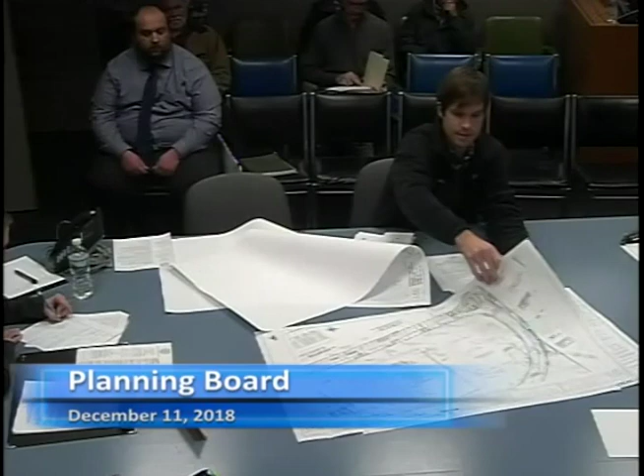The only other comment was detail for the illuminated crosswalk sign. I provided a cut sheet last time, but I've added that into the design plans - it's right here. It's going to be a solar-powered, push-button actuated crosswalk where the lights flash when somebody hits it, to really grab drivers' attention in that area. It's MUTCD compliant.

So what happens if it's been cloudy for 2 weeks? I'm not 100% sure on that. I just know Mr. Coyle said a solar-powered one would be acceptable for him in that location. So again, that's what we're proposing.

Just make a note, I want to hear that he said that. So you added it to that plan? I don't see it on this plan. Well, I do have these comments - I made those today. I do have some small copies if anybody would like them.

Here's my problem - we're in a meeting, we're supposed to have this stuff ahead of time, and you want us to make a decision on this tonight when none of us had a chance to look at it. It's the same plans I submitted, with just minor changes. No - you have a drain crossing now, and you don't have a detail on how you're going to cross that drain. I don't know if you're using stone, flowable fill, whatever, I have no idea. It's going to be standard construction practice for crossing drain lines. And that is what? Normally you backfill with crushed stone to support and protect the pipe.

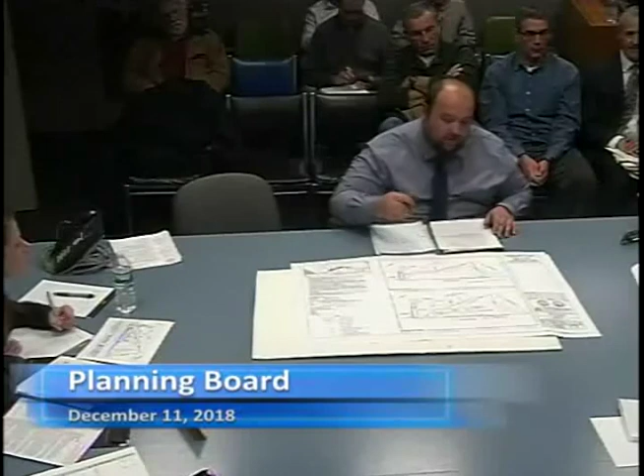And you're going to tie into the existing sewer, correct? Yes. Do you know what size the sewer main is? I know where the lateral is, I can get the size on there. There is a lateral, yeah, there's a lateral.

So my question is, if there's a lateral, you're gonna tie into an existing lateral, why is there a detail for Y&T saddles for 8-inch lateral sewer connections? Those are pretty standard, kind of boilerplate details. I can update it to make sure it accounts for tapping into a lateral.

And you already said you're gonna get the soil test to us. Yep, that has been performed, and I can get you all that information once I give you my next plan set. Just the landscape plan, we're gonna need that. How wide is your opening, the curb cut that exists? Can you just put that in when you bring the plan, please?

Until we bring this one up. Looks like it's pretty, looks like it's 40 feet. No? 40 feet. That's 50. No, it's a huge opening. Actually, it looks like there's two on there.

And we'll need something of a landscaping plan. Now, forgive me, I'm not super familiar with Auburn's bylaws - do you have a landscaping guideline for parking lots? I can check our bylaws and get some details. Where we'd want to see landscaping is just along the front, not on islands, to provide a little screening as you pass - maybe some arborvitae's or something low along the front. Nothing too tall, because you don't want it to block the sight line. You want something that's gonna look nice, like a yew or something like that. Make it look nice.

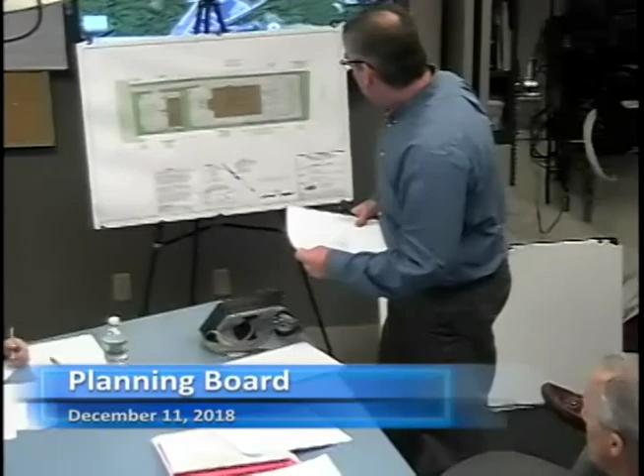We took comments we received from the board last time, and it doesn't reflect on this plan, but we have widened this driveway from 20 feet to 24 feet. That opening has widened a little bit as well, just to incorporate the same radius, so that driveway is 4 feet wider, basically from here all the way through to its end.

I did put together, and if I can pass these out, some sections we talked a little bit about — the grade changes. A section through the property, and a section through the center of both buildings, to show the grade changes and give you a little perspective from a section looking forward from the street. If it's okay if I pass these out?

One more? Two more, sorry about that. There you go. And there are — I just want to say, two sets.

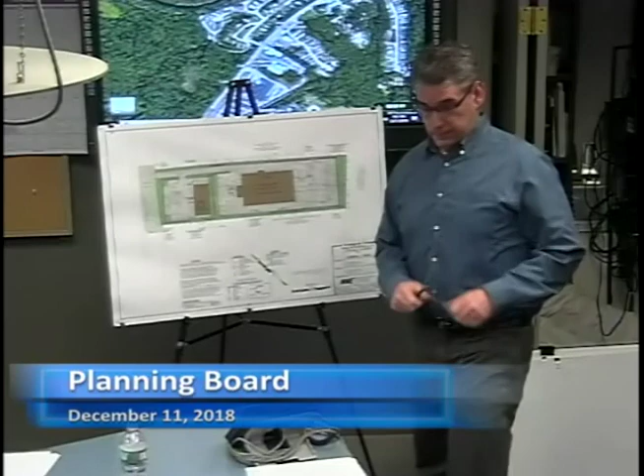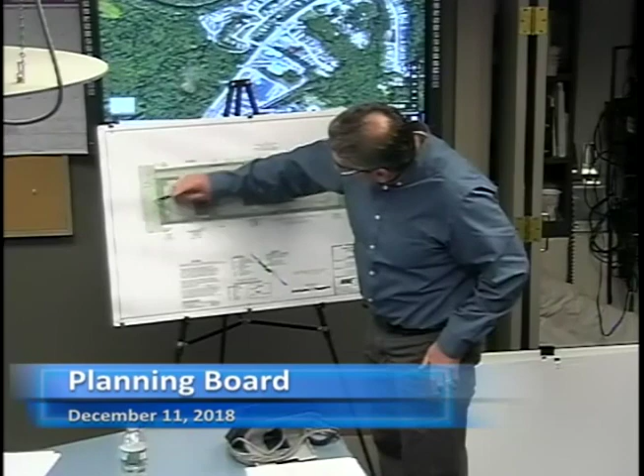And what about the landscaping on the front side? Yeah, we do have some plantings in the front. There's a large planting bed in the front, and then some ornamental trees along here, that was part of the original submittal. There was a fairly decent-sized planting bed right in here, actually.

Mostly low plantings, yes, but you may recall when we met a couple weeks ago, there was a landscape plan that did include a significant number of plantings in the front of the building as well. But there was a plan, I don't know if you...

And I remember we talked about something, I'm not sure what it was, putting the building in the front and the parking in the back, or the parking in the front and the building...

What we're trying to do is get more visibility right on the street versus having all the parking in front of the building. There was a lot of time put in by the engineers and the contractors with the client about the best way to gain visibility and fashion the site so you're seeing the optimal look from the street. One of the issues was that if the retail building were flipped, the back of the building would essentially be facing the street, which at the end of the day, from a design standpoint, was not optimal.

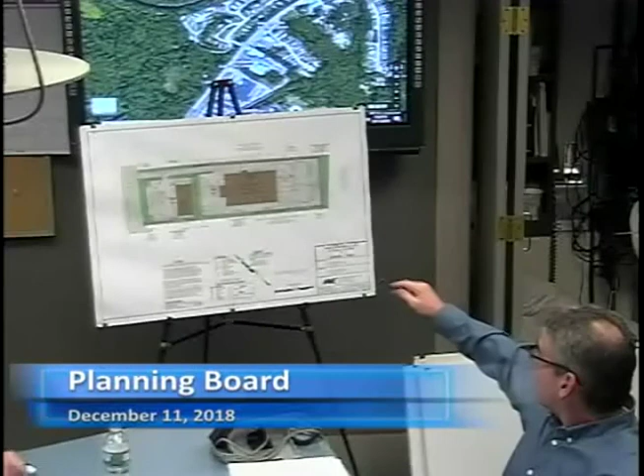So how does not having a fence on the back side of the property help with safety? I think your point is well taken, but it's because it's not populated behind the property. Our bigger concern was people seeing it from the front or the sides and coming onto the property. It would be a deterrent for access if there's no fence along the back, since somebody would have to travel a pretty long distance, basically around the sides of the property, to get into the back.

From the residents that are there, they'd have to go how far? I think the last of the residences are roughly in this area here and here, so they'd have to come about 150 feet or so around to get into the property, and this is a fairly steep slope too, so it wouldn't be the most negotiable terrain.

Yeah, thank you. It's a good question. Yeah.

Good point. We're just saying that the active side of the doors, the actives are on the front of the building, not on the sides. So again, just going to the board's issue and concern with noise and visibility, that won't be an issue on the side of the building.

Just while you have it up there, where did you think for your snow storage? Snow storage here, here, and the area in back as well.

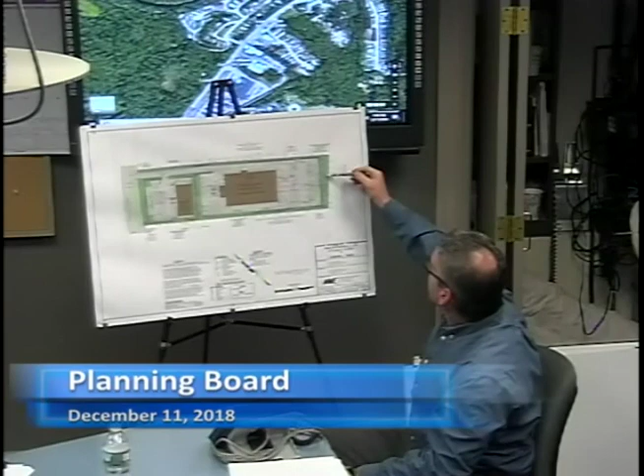And you're going to do plantings, as we said, in the front. That's correct. But you're not proposing plantings along the fence? That would be our preference, correct.

So, to poll the board, Steve, how do you feel about the fence on each side and plantings, which would be on the outside of the fence, on the residence side? I'd prefer to see plantings as well as the fence. Nick, I'm indifferent. Scott, fine with just the fence, to be honest. John? Well, a fence creates a sound barrier, but it also creates a reflection of sound.

So if the fence at the bottom of the page is lower than the fence at the top of the page, whatever noise hits the fence on the top is going to go right over the fence on the downside. So I'd be in favor of fence and evergreen trees to absorb the sound. Arborvitaes or something, because those get 20, 30 feet high. You're also providing a visual buffer and maintaining more of a natural look on both sides.

So it looks like they'd prefer to have some plantings on the outside. Just to clarify, Barry London speaking, you want the vegetation to go above the fence? Sure. Well, you plant them at, say, 5 or 6 footers, but eventually they'll grow to 15, 20 feet. It depends on where they're planted, how big they're going to get, and what kind of soil.

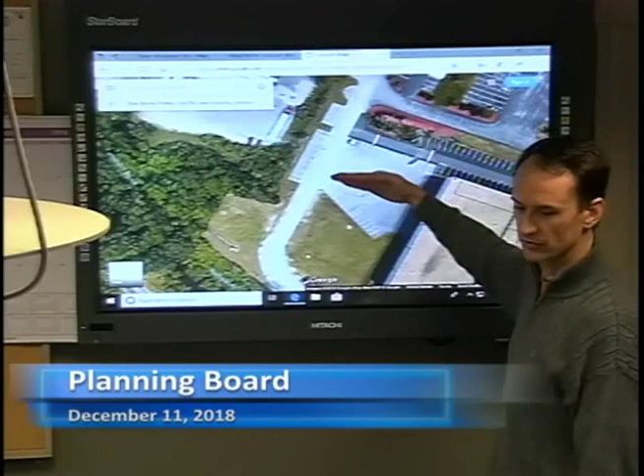What they requested and reviewed with DCG was that we could keep that if it was requested, but they actually preferred the DCG group preferred this gets changed to a landscape bank, a barrier now between that drive lane and the parking. It's actually a more efficient use of the space, because when we get rid of the parking here and start the parking further back, with the telegraph pole where it is, it was actually more efficient and I needed less square footage.

So that's what it is. We're doing this pretty much just so he's making a barrier - instead of having an ugly chain link fence, you have a sloped area with parking spaces back, and plantings on it, so when you're driving up that big driveway, it looks nice when you pull up to the front of the building.

I'm back tomorrow at Inland Wetlands. There's the brook that's within 200 feet. They have the plan, and I'm back tomorrow just to see if they had any comments on that as well.

You're not really changing anything other than adding to the corner of the parking lot, and you're taking paving away. So it's pretty much an even trade as far as what was there and what's going to be added - some landscaping, making it look nicer. Not changing any grades out in the back, different runoffs.

It's a pretty simple one, but you've got to go through - and Auburn's beautiful this time of evening.

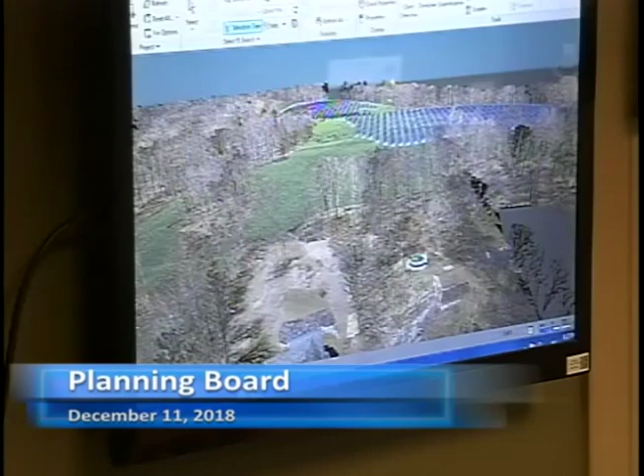Is there any vantage point anyone specifically wanted to see? So you're gonna place them in, when you would drive up Henshaw Street, excuse me, there's a first, what used to be a field on the left, you driving up Henshaw Street, there was a field like it would be in the form of a rectangle going back. When you weren't quite up to the... That one there? No, that's the one right in back of, well, I go by, at the end of Henshaw Street, right where it ends, there was a house. Okay, and that field would be the northernmost field in back, that big long one, right in back of the house.

Okay, the two green areas would be those on the west side, on the left, and then down a little lower, right there, right below where you had that rectangle. I'm not sure if that's where, is that your property? Or is that might be Racky's old pit? Tom, that's further south, Racky's old pit. And then the two of the westernmost fields, the long one in the back, and then there were some to the right.

Yeah, if you see here, that field you're talking about there, so that's south of the project. Or, I should say east. And there's where you're snaking your road in right off the curve on Leicester. That's what we had asked about before, to use Henshaw Street.

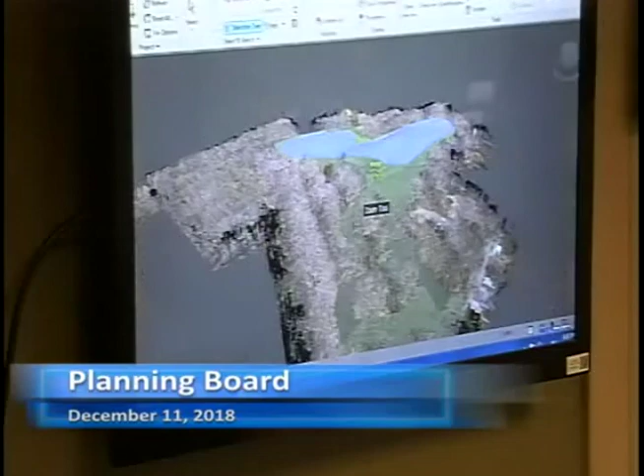Can we see the view from the corner of Leicester Street where you're going to enter? So the corner there is, looks like the corner's going to be right around here. That's where you're entering your driveway for access. So right here, this is where it's cleared. Oh, this is the corner, that's the drive there. So the clearing starts here.

That climbs in there significantly, doesn't it? Yes, yeah, we addressed the grade matters in our response as well and worked that out with Burton.

Hold it right there for a second, just explain which way. It's way up, yep. So the road's gonna come in, it snakes around, goes behind these trees, then it snakes again behind the second row of trees, and then to the right. This area is shown as cleared because that's where the detention basin is going to be located.

I just want to clarify, when you're down on Leicester Street where the curve is, you're gonna enter your access road, and where the fields are gonna be with the panels, that's gonna be a considerable elevation higher than the road - maybe 130 feet difference. You won't be able to see them. But we'll need to see the plans because we'll want screening, and you'll maintain natural vegetation for the people down lower on Leicester Street, so that if there ever was any glare or anything.

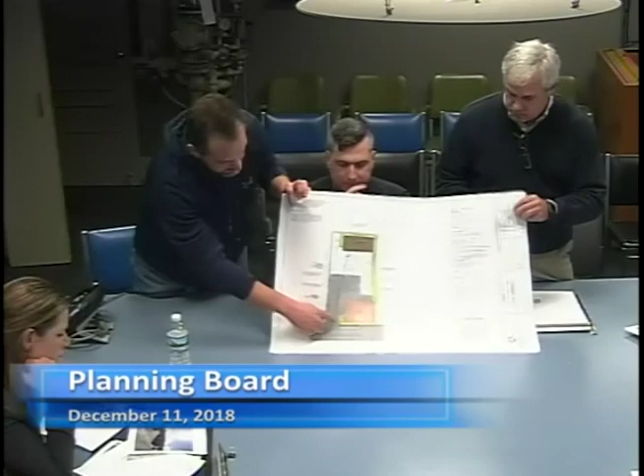We did the oil separator when we opened that up, because I've heard things too, and that was all clean. When you say you did an oil separator, did you put one in this area? No, there was one existing already, out in the open - it's on this front island right here, the tank. Where's Southbridge Street? Right here. Right in the corner of that building, this little thing, it looks like a flower pot. So there was an oil water separator, 'cause that was a garage for years.

The 21E just protects you, not now - he already owns it. I don't have a mortgage to preclude that, I own it outright. When the house is removed, whatever we're digging up is going into the hole for the house, so there's nothing leaving the property anyway. But you might want to do a 21E just so you catch where it is now and make sure it doesn't go any further, or show that it was at this point - you've got a designation as at this point, and then you can check it against something later to see if it gets worse, or if someone calls on you to do it. You can say, when I got it, it was like this. It's for your protection.

That was an auction property, right? It was, yeah. The town bank owned it, right? Sure the bank didn't do one? No, the bank didn't do it, no. I'm shocked.